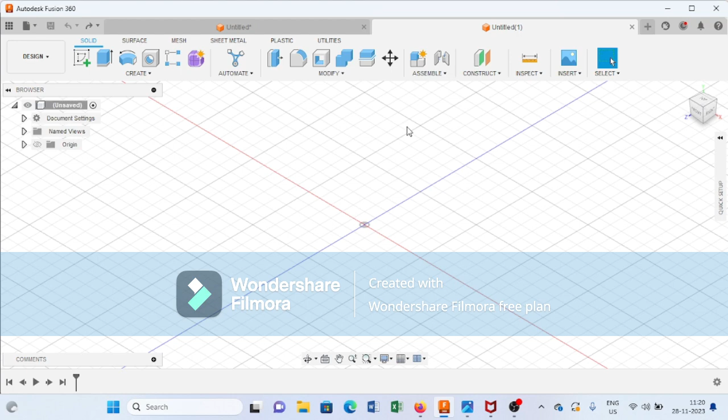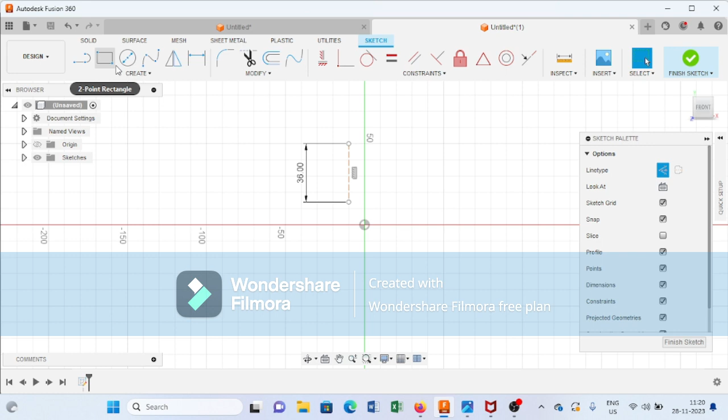From here I will select create a sketch, then select this plane. After selecting this plane I will draw a line of 36 mm, press enter. Now we will draw a circle of 24 mm radius or 48 mm diameter.

This way. Now we will draw one more circle of 96 mm diameter. After drawing this one, again we will come on this drawing. Now we can see that we have to draw a line from this point about 54 mm.

Then we will draw this line of 12 mm. Then we will draw this line. We can see from here that is 54 minus this. This is 54 minus 28, so it will become 26.

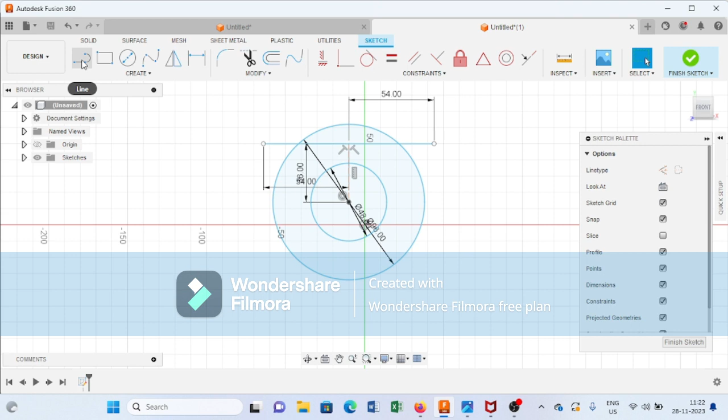So first we will draw a line of 12 mm in this way. Then we will draw a line of 26 mm in this way. Then we will draw one more line of 16 mm in this way. Then we will close this loop and press escape.

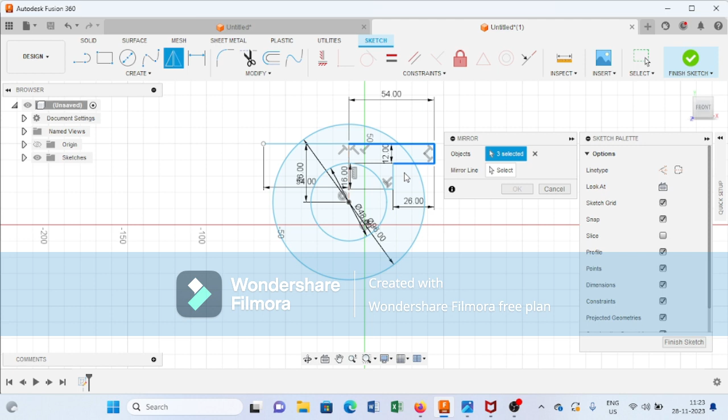Now from here we will select this mirror command and select the objects this way. Select the mirror line, and as you can see we have created such kind of drawing.

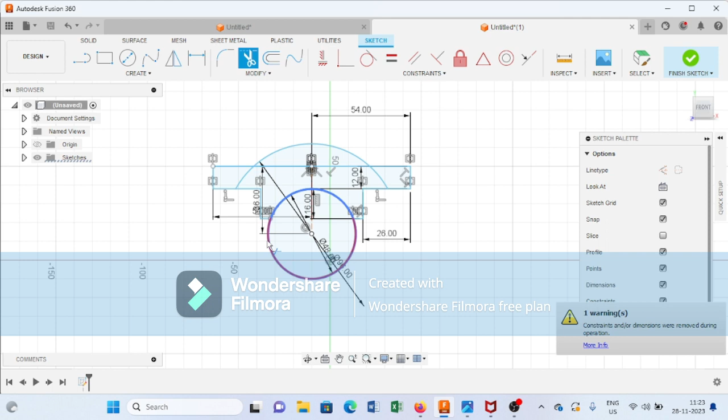Now we will select this trim command and trim all the unwanted edges. Now as you can see, we have created such kind of profile in our Fusion 360.

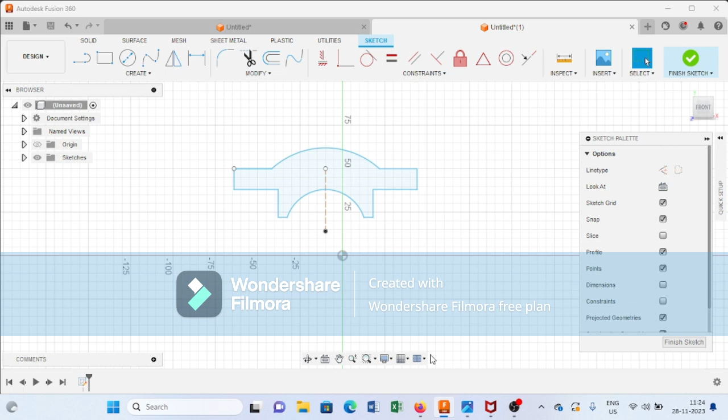Now finish the sketch. Go to home position, select this extrude and extrude it up to, as we can see in this diagram, 46 mm.

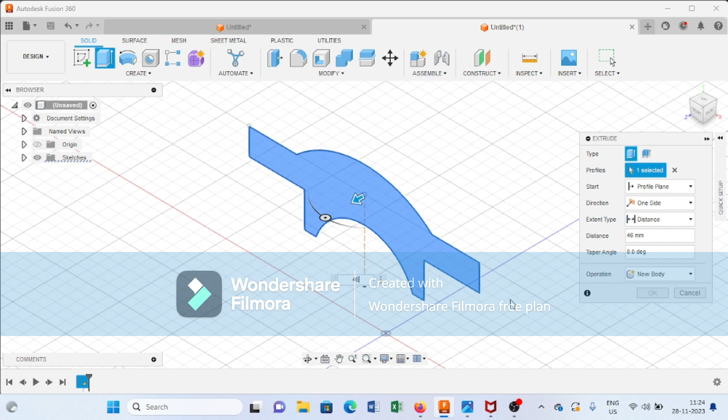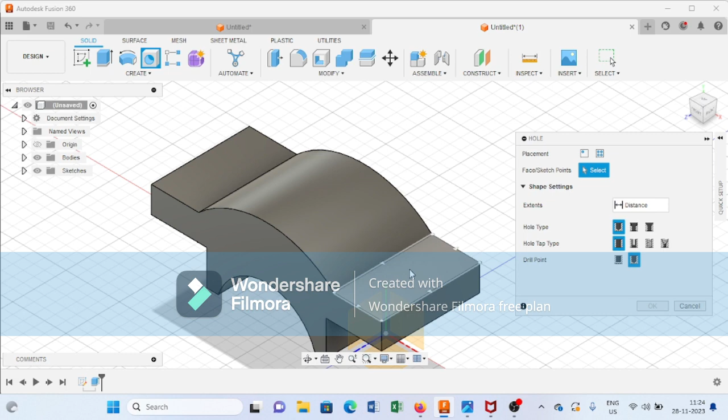After this, now we have to provide these two holes of 12 mm diameter. Select this hole command. First we provide the diameter, that is 12 mm.

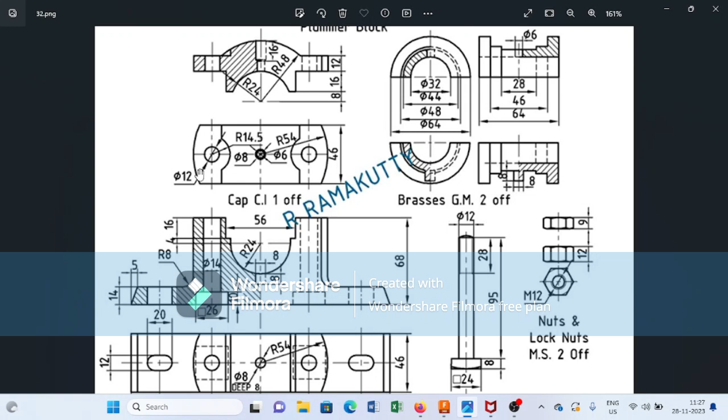Now the next is the distance from this line is 23. This 23. From here, from this drawing we can see that the distance of the center of this particular hole from this point is 54 minus 39, that is 15.

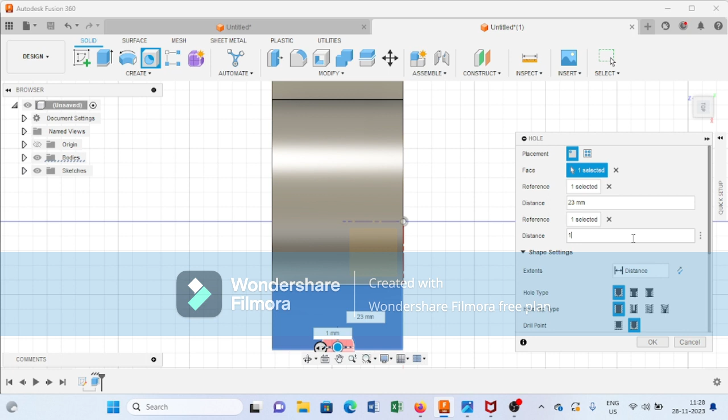So we will provide the reference from here, it is 15. So we will provide here 15, and press.

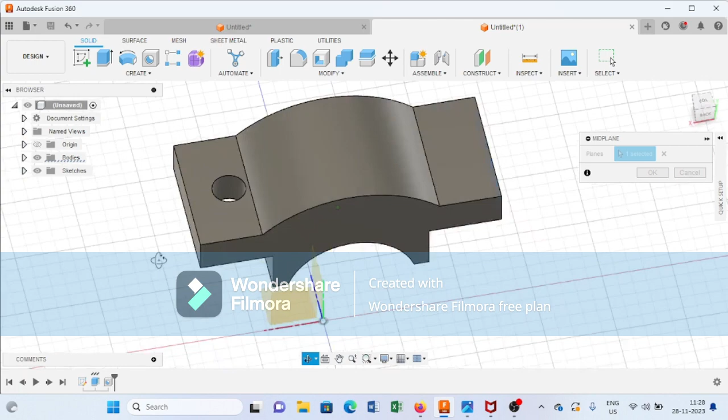In the similar way, we will provide one more hole here, or we can use this construction and create a mid plane between this point, this plane and this plane, and press OK.

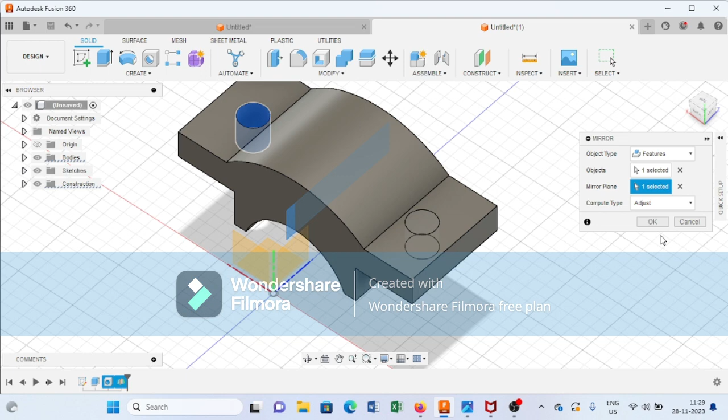After that select this mirror command and provide the feature as all, and mirror plane is this one, and it will create one more hole here. In this way we can create one more hole here.

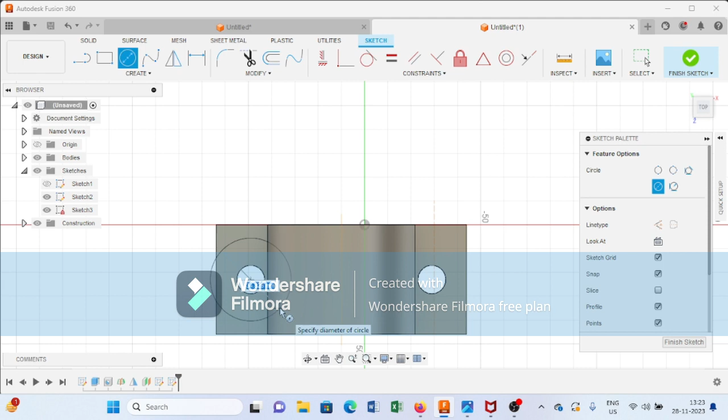Now the next we have to create this particular one, arc of radius 14.5, that is 29 mm diameter. For that, again select this plane, create a sketch, we'll draw a circle of 29 mm and press enter. Then finish the sketch.

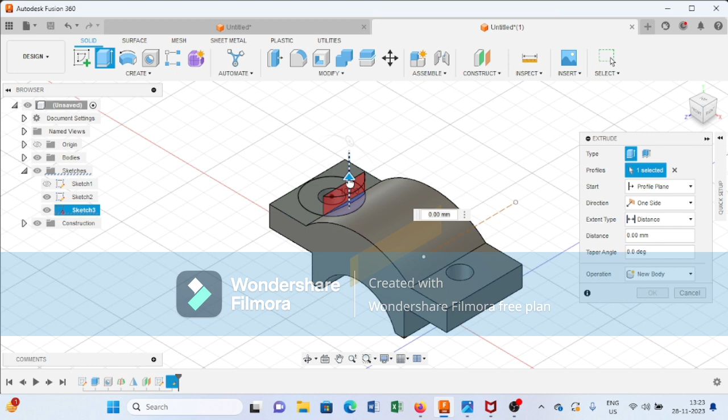We just do it and select this one. Again select this, extrude it. Let's select this and press OK.

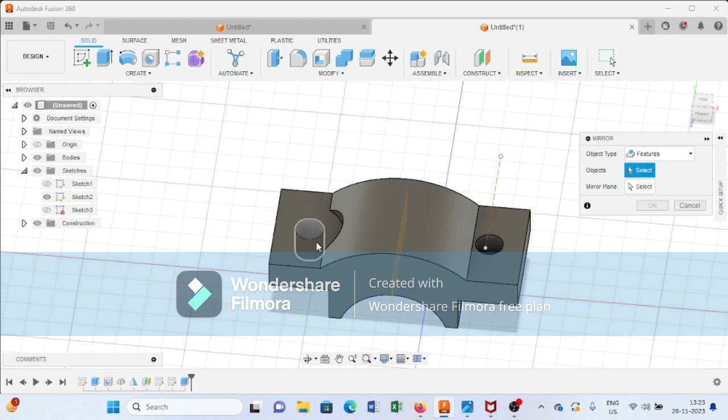In the similar way, we will create here. For that, select this mirror command, select this feature and select this mirror plane and press OK. So as you can see in this particular figure.

Now the next is we have to create this 16, and the hole is 8 mm, and that is counter bore hole. For that, just finish this, select this hole command.

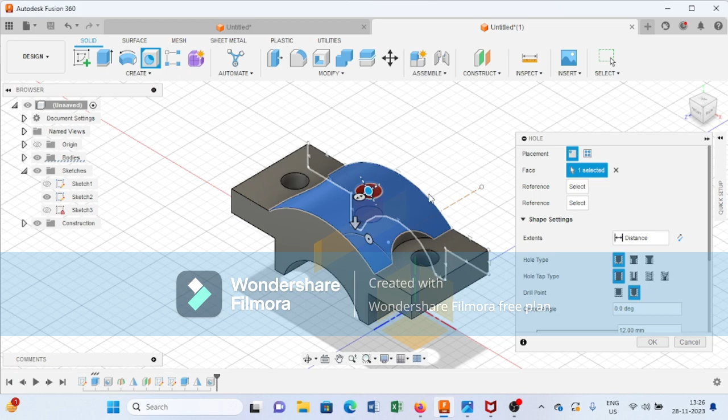Now the next is we have to provide some references. First we will provide here the dimension of this particular hole. We will select this counter bore, and from here we can see that outer diameter is 8 mm and this is internal diameter 6, and this is the length 16, and this is a through hole.

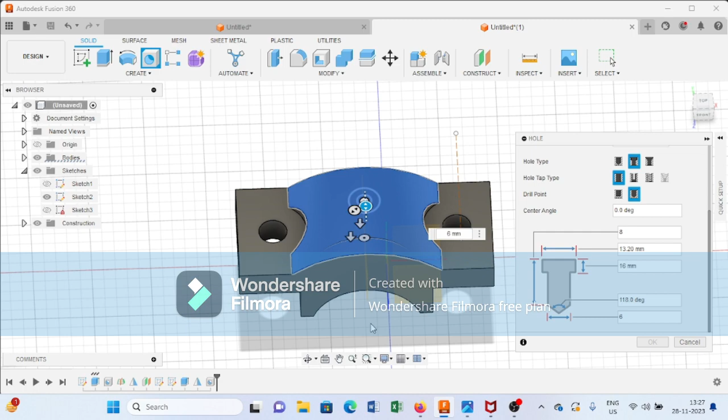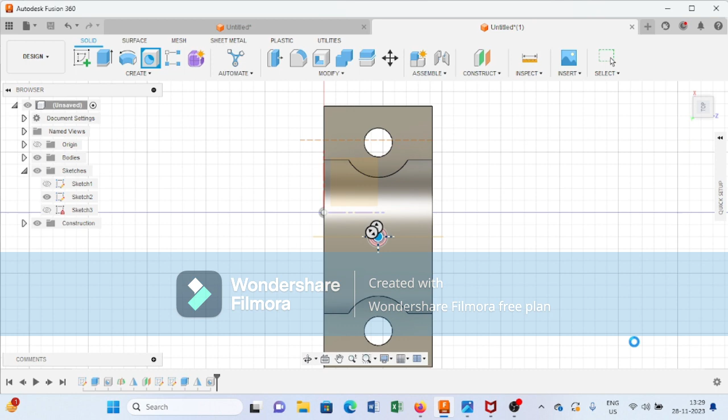So now you can see we have created such kind of cap with the help of various commands available in Fusion 360. In the next videos we will complete all the other parts of Plummer block and we assemble all the parts one by one.